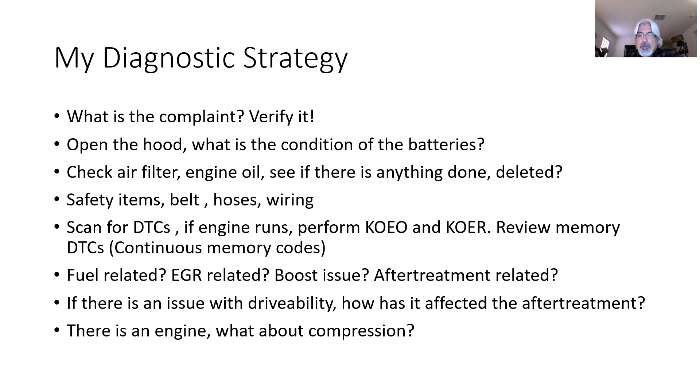So since we're focusing on turbos, let's talk about the 6.7 turbos. A turbo's only as good as the engine that it's running, but always remember something: any kind of turbocharger needs heat, and that pressure is the heat that we need. Obviously there's such a thing as too much heat too, but the point I'm trying to make is, do we have enough heat there? Because fueling can take a major toll.

So my frustration when I talked to technicians this morning, I was at the shop and they were telling me about how this truck had injectors and it just didn't have any power. And they're saying it's got $10,000 worth of things it needs on this truck, blah blah blah. And I'm like, dude, it could be injectors, because if you buy these from Joe Schmo Blow's injector rebuild service and they don't know what they're doing, it's like the injectors could be it, because an injector has to have so much of play.

That's all shimmed and calibrated by Bosch, on these piezo common rail injectors. Everything has a calibration, and it's not something you could just take apart, clean up, and put it all back together. Sure, you can take nozzles off and clean them or replace them, but the rest of the body, hell no.

Turbos need heat, and fueling is very important. That's why in previous videos I talked about the spray paint test. The Mitch spray paint test, if you've seen the videos, is where you take a spray paint and spray it on the exhaust manifold. What you're doing is firing up the truck, and if that paint doesn't burn off the exhaust manifold, you definitely got a fueling problem. In this case, it should be burning off, you should have enough heat there. So there's a quick tip.

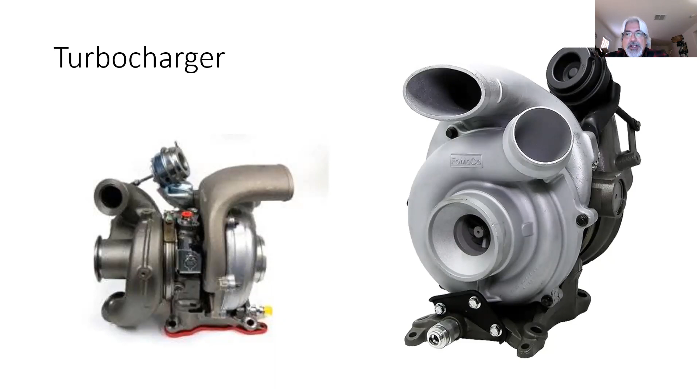Same manufacturer, but the biggest pet peeve we had with the 6-liter when we compared it to the LLY Duramax that used the same turbo, and in this case the variable vane turbos, I'll show you a brief video on that, is the fact that you actually had no... in other words, there's no feedback.

There's nothing telling it, because when I test a turbo on an LLY Duramax, all I got to look at on the scan tool is desired variable nozzle position and actual variable nozzle position. If it wants 10%, it's 10%, 20%, 20%, 30%, 40% - in other words, of those vanes opening and closing. If you don't know what I'm talking about on those vanes, hold on, I'll show you a brief video on this.

What I'm trying to say is that you're going to have a feedback. The Duramaxes opted to use a variable vane position sensor, so in this case the computer always knew the positions of the vanes, while on a 6.0 and a 6.7 - no, 6.4, 6.0 and 6.7 - the computer was only guessing the position of those vanes, believe it or not. So what is telling the computer the position of the vanes? He has no idea, he calculates it. He rehomes itself, but he doesn't know exactly where those vanes are at, he just guesses it.

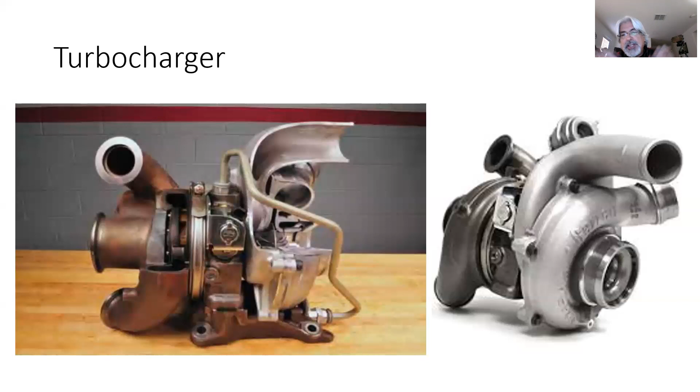So what are the main inputs that a computer uses? Both exhaust pressure and manifold absolute pressure, which is the boost pressure you could say, and the exhaust pressure. So that's what it's looking at.

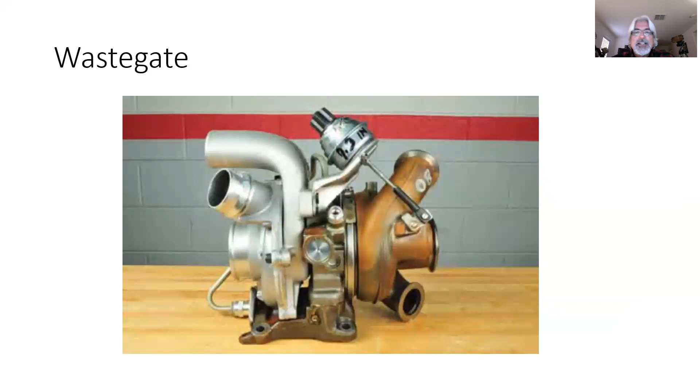With that said, the early versions of the 6.7, which was called a Scorpion motor, it actually had a variable vane, but it also had a wastegate. That's what we're looking at right here, that is the wastegate right there. So in this case, that was a vacuum actuated or vacuum controlled wastegate. In front of that motor, in front of the injection pump, there's a vacuum pump, which is not only used for the EGR bypass, but we're also using vacuum to control that wastegate. So yeah, there was a wastegate being used there.

When you saw the cab chassis versus the pickup on the introduction of this, there was narrow frame versus wide frame. The cab chassis truck was designed like an ambulance chassis or a motorhome - those are the cab chassis. The pickups are the Super Duties - F250, F350, F450, and so on. Those were using the wastegate with the variable nozzle, while the cab chassis was just variable nozzle.

And then to top it off there, let me backtrack here on the slide. Oops, I guess I'm gonna have to show it on here. As a matter of fact, let me zoom it up.

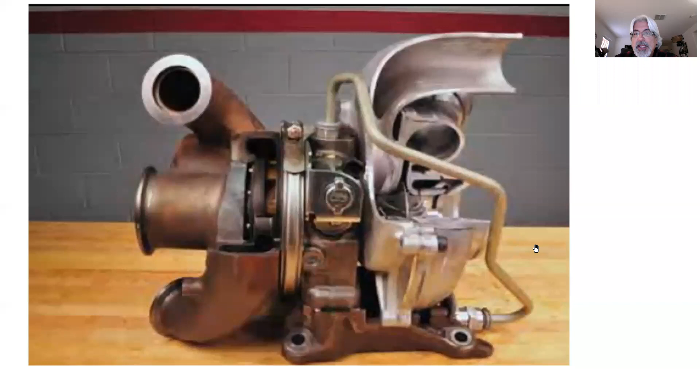You're gonna see that it actually was a dual setup. There were two impellers creating boost. If you look closely, there was a low pressure setup and a high pressure setup, so two turbine wheels utilized to create boost on these models. Ford called this Dual Boost. That created the adequate boost you needed.

Now, on the side of these, you're going to see there's an actuator, the turbo actuator. That's the solenoid that sits on the side, and that's what's controlling the vane. It's a two-wire connector. As a shop, we tend to stock these because we can test them, along with the pigtails. The connectors are always hurt, ears broken off or something, so we can install a new pigtail because we've seen loose connections causing boost issues. So check that connector going to that turbo.

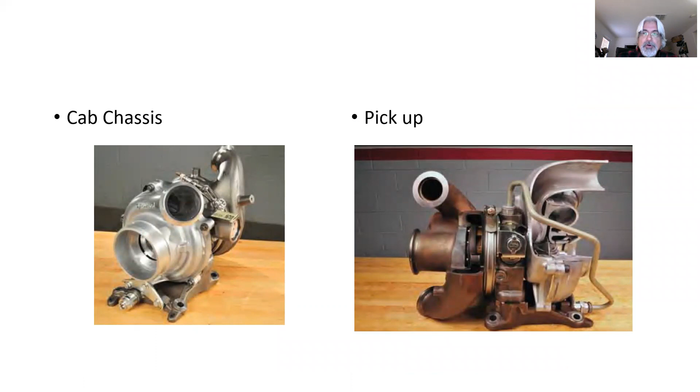When I hear about turbo leaks, the base of the turbo itself has both oil and coolant. The coolant maintains the temperature of the turbocharger, but there's also oil, used not only to lubricate the turbo but also for the turbo actuator. It's an electrohydraulic setup - we use engine oil pressure and the VGT actuator solenoid to move those variable vanes.

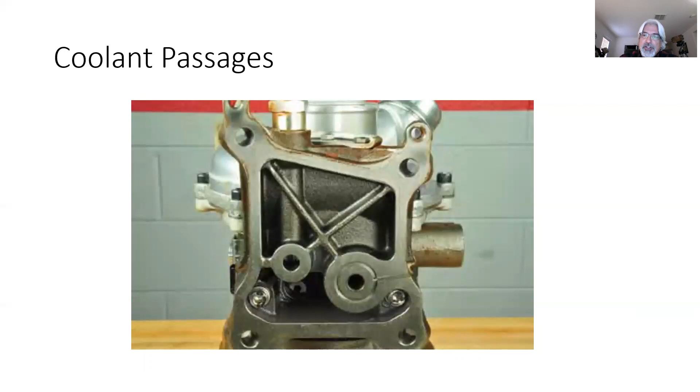It's imperative that this gasket must never be reused, and you need to torque it to specifications to ensure a good seal. When I see a sloppy job, the truck will come in with an oil leak, especially on top of the engine valley, meaning someone did not correctly seal or torque it. A torque wrench should be your best friend - you've got to torque those four big bolts that hold down the turbo, or you'll wind up with a leak. Make sure the surfaces are clean to do that proper repair.

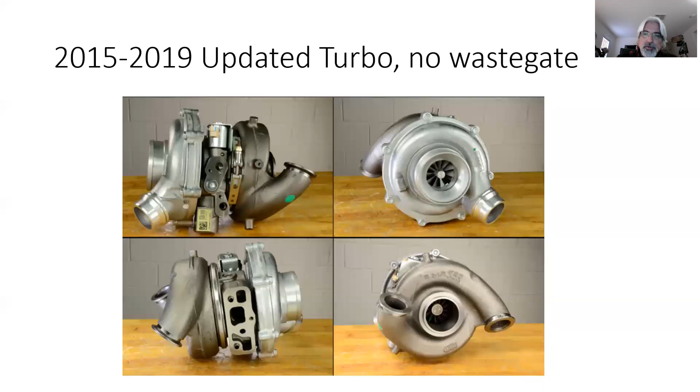Now, since time is of essence here, and I'm still keeping you awake, right? Got you here? You haven't left? You haven't clicked? All right.

In 2015, we saw bye-bye to the wastegate. I haven't confirmed this, and I always forget to call Ford to ask, but I'll update you in the comments later. What I'm trying to say is they got rid of the wastegate, no more wastegate, and went with one big turbocharger. The reason I haven't talked to the dealership is because I'm told, but haven't verified, that when you call for a turbo for an earlier model like a 2012, they'll sell you this turbo with no more wastegate. So stay tuned, I'll figure that out, but that's what I'm told.

The bottom line, as general information, is that for 2015 to 2019 we went to one big turbocharger on these applications. It's still got the actuator, still got the variable vanes, but it's just an enhanced, more robust version of what we saw with the cab chassis, just a bigger turbo. So no more wastegate as of 2015.

Now, what happened in 2020? In 2020 and 2021, we saw the Borg-Warner turbo come about. That one has the big fat square actuator on the front of it - we won't talk about that here. But yeah, they went to a Borg-Warner. These are still Garrett-style turbochargers, just like your 6.0.

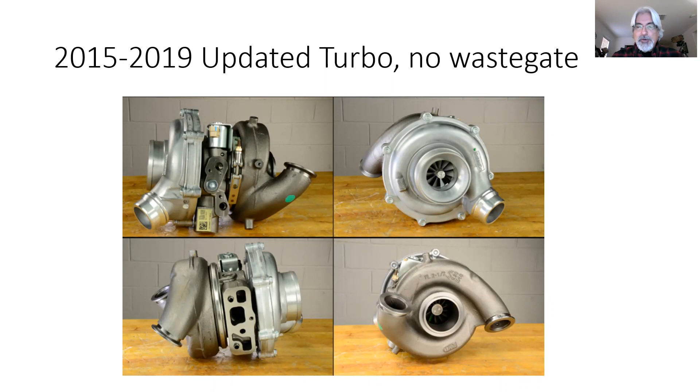Now when you look at what's going on with the turbo, hopefully this will show up here. A turbo naturally spins, you see the blue and the red, and we see that we're boosting air. So in this case, boost means to add pressure above atmospheric pressure. If atmospheric is at sea level 14.7 psi, anything above 14.7 is a boost.

Now on the exhaust side, like I said, we need heat. That heat and that pressure from the exhaust on both of the manifolds on the 6.7 generates that boost that we need in order to create the power that we need. So power is boost, right?

Well, if we flip this around, you're going to see that there's variable vanes right here. And those variable vanes, as you can see, are opening and closing. That ring that's moving those vanes is called a unison ring. And we see the variable vanes opening and closing.

So with that said, that is controlled by some type of actuator. In this case, this actuator is moving and closing those vanes. So in this animation, what we're looking at here is a solenoid, and that solenoid is controlling the engine oil pressure.

Let me pause this for a second. Now that engine oil pressure comes in through here on the top. You'll see an oil line on top of these turbos, both on the 6.0s and the 6.7s. So in this case, that oil pressure is going to be diverted either to exhaust or to apply oil pressure.

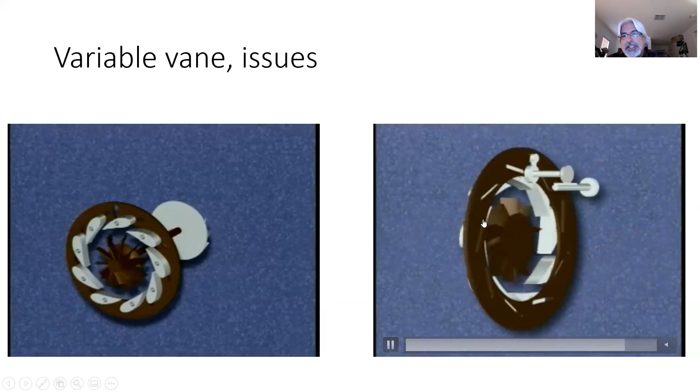So if I apply oil pressure through this passage, it's going to fill this gap and push this piston to the other side. Now as you see that piston moving, it's moving a rack and pinion, which actually moves the unison ring, which is opening and closing those vanes. See that? I know I said it kind of fast, but you can always press rewind.

But let's look at it a little bit closer. Excuse me, wrong button. What I'm going to try to do is zoom this up and show this. Okay, so as I press play here, come on... let me backtrack. Let me play it, and let me move it forward.

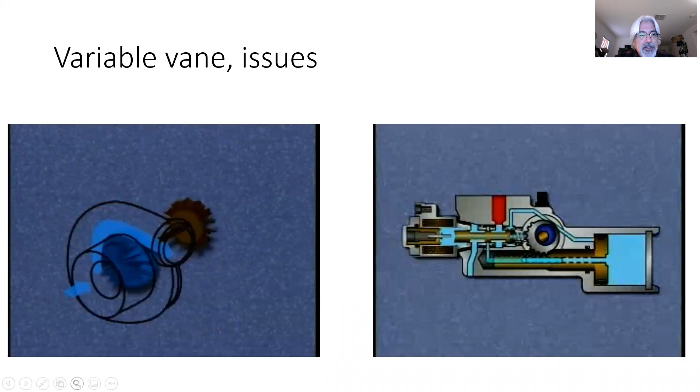There we see the rings. Hopefully we can see this as I zoom it up. You're not going to be able to play it zoomed up.

Okay, well what I was trying to do is show you once again that the movement of these vanes is attributed to the fact that the rack and pinion is moving them, which is this guy over here. But these vanes open and close.

Now as the vanes close, let me stop there. Watch the speed of the wheel here. What you're going to notice is it slows down and speeds up. So for example, as I'm going 65, 75 miles down the highway and I need more power, I'll hit the accelerator, the vanes are going to close. So therefore I'm going to see more boost created. And then as I back off on the accelerator pedal, let's say I'm starting to cruise a little bit, the vanes will open up. So these vanes open and close.

So let's play this again. What I'm going to see here is as the vanes close, we should see this wheel spin faster. So come on, let's go. There we go, it's starting to close, spins faster. See that? But when the vanes open up, they slow down.

Now why does that happen? Well, let's backtrack again. So in this case, they're closed. What's happening is that the area between these vanes, where my cursor is right here, is either becoming narrow or becoming more open. And it's called the Venturi effect. The Venturi effect is actually creating more speed, so that exhaust is coming up with more speed, but the problem is it creates more back pressure.

That's the Achilles heel, or the weakness, of these turbos: as these vanes close to create more boost, that means it's a narrow passage. On one side you're going to have higher pressure, but on the back side you're going to have a lot of pressure too being built up because you're restricting the flow. So the weak part of this is that it generates a lot of back pressure. That's the bad thing about them.

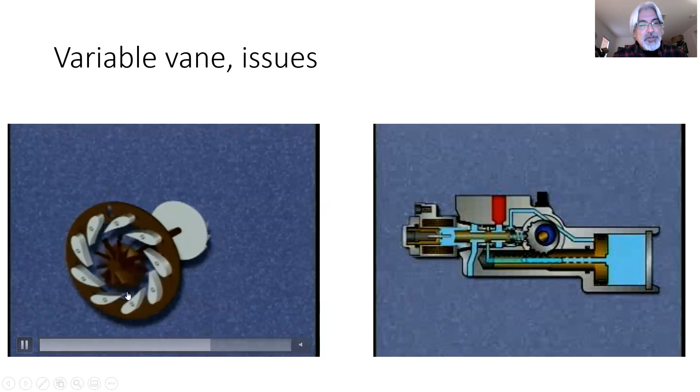But anyways, what it is, is these vanes are creating a venturi. If I could see this opening right here, as I hit play again, you're going to see it. This opens and closes this gap right there. So again, opening and closing the vanes: more pressure spins it faster; opens up, less pressure, therefore not as much being created. This turbo can spin slower.

So what is the advantage of a variable vane turbo? The advantage is that it can act as a small turbo or a big turbo. With wastegate style turbochargers, they create boost, boost, boost, boost, and finally the wastegate opens and pressure dumps, boost goes bye-bye. It builds up again, wastegate opens, it dumps.

Here, it can vary the boost. So therefore I can have 10 pounds of boost, 15 pounds of boost, 12 pounds of boost, all within the movements of these variable vanes.

But like I said already, the problem on a 6-liter and on a 6.7 is that the computer has no clue what these vanes are doing. So that's the problem. It looks at boost, hey I'm getting boost, it's looking at exhaust pressure. Yeah, on a 6-liter the exhaust pressure is there, but it really doesn't add a lot of feedback in terms of controlling what the turbo can and can't do.

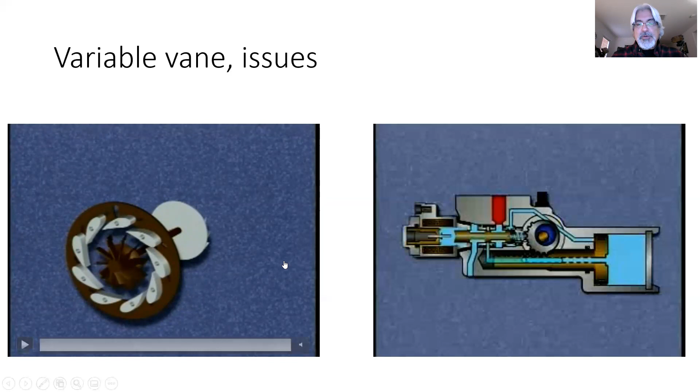Now going back to the actuator once again. What's going to happen is this actuator is merely a spool valve that channels oil pressure to the center or outward, and also releases this pressure. Here you can see the pressure coming out of this, and this is all channeled by the spool valve within the actuator, which is moving the rack and pinion.

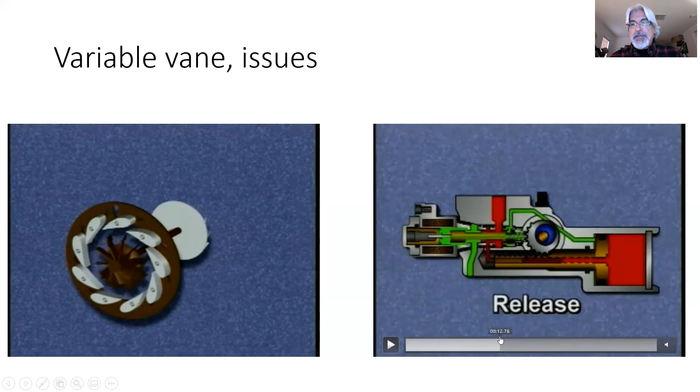Hold on a second, let me come back here. So in this case, this is moving the unison ring right there, you can see it right here. So what's moving this piston from side to side on this part of the rack and pinion is oil pressure, pushing on one side to the other.

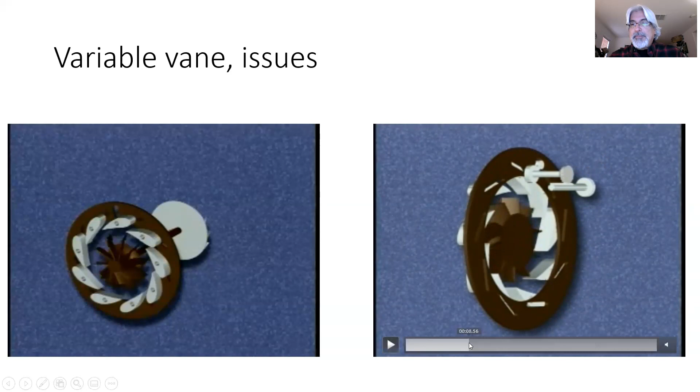That's why it's imperative that oil be properly maintained for proper life of these turbos, because it not only lubricates, but it also acts as the coupler, or shall we say the actuation, that makes this piston move from side to side to move this rack and pinion in order for the unison ring to open and close those vanes. So that's what we're seeing there.

So when guys look at sticky turbos, I mentioned the unison ring, but what can also cause a turbo to stick is poor quality oil that can actually stick this piston right here. What else can do it is the spool valve having a lot of gumming going on right here. So in this case, that spool valve can stick. So that's what can happen too. Not a good thing.

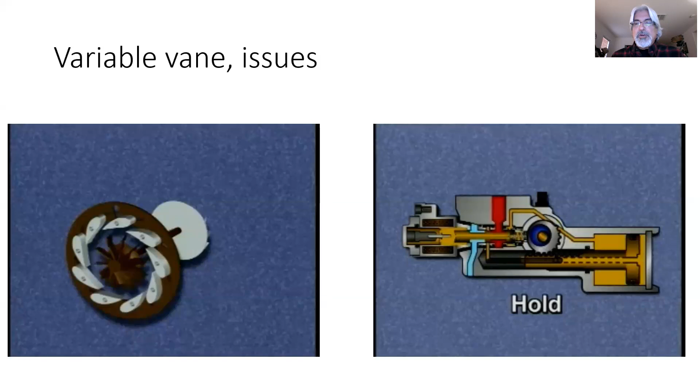All I'm saying is that in order to prevent issues with the turbocharger, you always want to ask: do I have good quality oil? Good oil, good. And again, make sure there's no intake or boost leaks going on.

But speaking of leaks, moving on, one of the tools we use is a smoke machine to find leaks. If you don't have one, that's okay. You may want to look at the boots and closely inspect them, and quit being cheap about buying a new boot.

Call Ford, call whatever auto parts store you want, and get some new boots. If the truck has over 100,000 miles, here in Vegas we get dry rot from the intense heat and intense cold. So it's a good idea to replace those boots and clamps if needed.

But in this case, on a 6.7 and on a 6.4, we do smoke tests because we're trying to find leaks. You'd be surprised how many leaks we find on many trucks when we do smoke testing, all over the place—from the intake manifold to the EGR base gasket, and also the boots you can see here. So that's a nice thing about having a smoke machine, to find any issues.

Another problem we have with creating boost is that I need good exhaust, because the back pressure I'm generating otherwise isn't good. So imagine this as we're looking at boost—I've already shown you this video, but here's the thing.

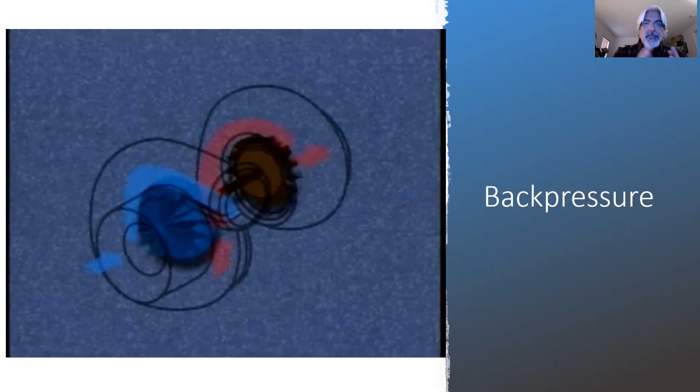If we're working on a 6-liter, for example, the story I classically tell guys also works on a 6.7. I tell them: okay, you're driving down the road, right?

And all of a sudden a rock goes across the charge air cooler on a 6.0. We have a separate coolant-cooled charge air cooler on the 6.7, so it won't happen there, but it'll happen on a 6.0. But I'm trying to make a point here: you've got to put yourself in the computer's place, the controller, saying, 'I'm controlling the actuator on this turbo.'

I'm making the oil go either direction to control the position of those vanes, in order to create boost.

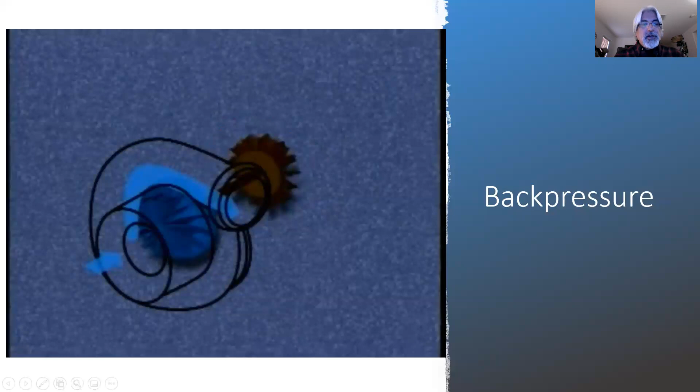So if you forgot what I'm talking about, it's this guy right here. Who controls this is, like I just showed, the rack and pinion—it's actually opening and closing to create the boost, right?

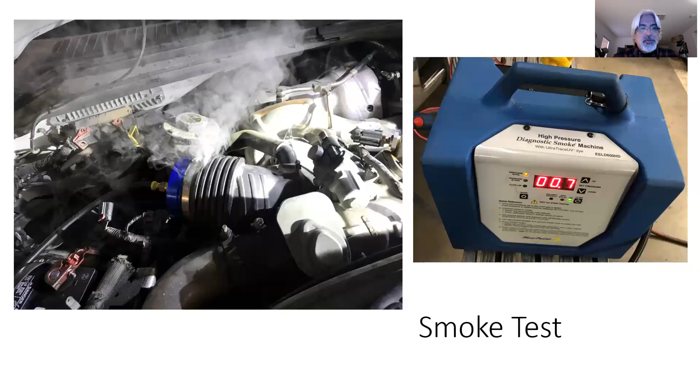So the question is, what tells the computer where those vane positions are at? There's nothing—on a 6.0 and on a 6.7, there's no feedback sensor for vane position. His mission is just to create boost. So going back to where I started, the computer is playing the role of the controller—he's the man deciding what's going on, right?

So what's happening is, once again, you're going down the road, let's say pulling a 20,000-pound trailer behind you, and there's a big 6% grade coming up.

And all of a sudden a rock goes across that charge air cooler on the 6.0. Now what's happened to boost? It's leaking out. All of a sudden the MAP sensor, which is measuring that boost, is telling the computer, 'I got no boost, no power.'

Now the driver sees he's got no power, so what's he going to do? He's going to press harder on the accelerator pedal. Still no power. Again, the computer goes to the MAP sensor saying, 'Dude, what's going on with boost?' And the MAP sensor says, 'I got no boost.'

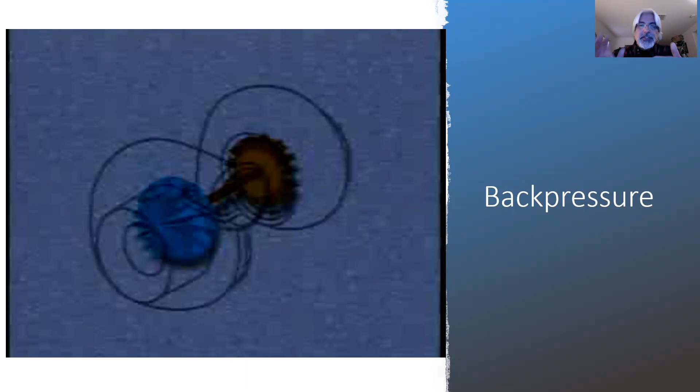So in other words, how long has that truck been running with those vanes continuing to close? Because when the MAP sensor says there's no boost, the computer doesn't know what's going on with the vanes—he's just going to close them more and more and more. So what's going to be created? A lot of back pressure.

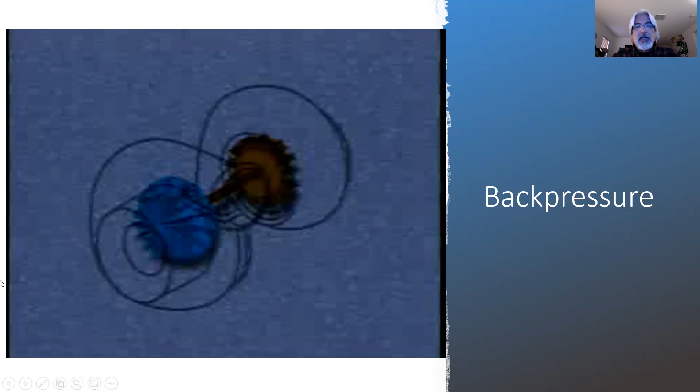So as we see in the animation, once again, let me skip over here.

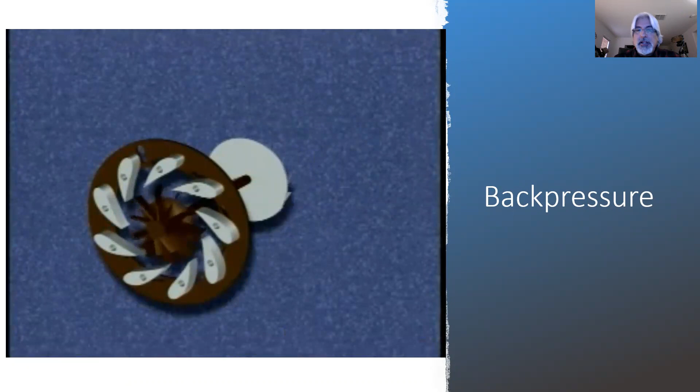If he wants more power, he's going to close these vanes more and keep them closed. The problem is, as we keep them closed, as we see in the animation right there, there's not enough gases going across, not enough pressure being relieved from the exhaust, because the exhaust manifold sends that exhaust right to these vanes. In other words, all exhaust must go through those vanes in order to go out the downpipe.

Did you hear me? All exhaust must go through those vanes in order to go down the downpipe down to the exhaust. So in this case, if these vanes are closed, that means you're creating a hellacious amount of pressure. But it's not so much the back pressure, it's the intensity level of heat that you got there.

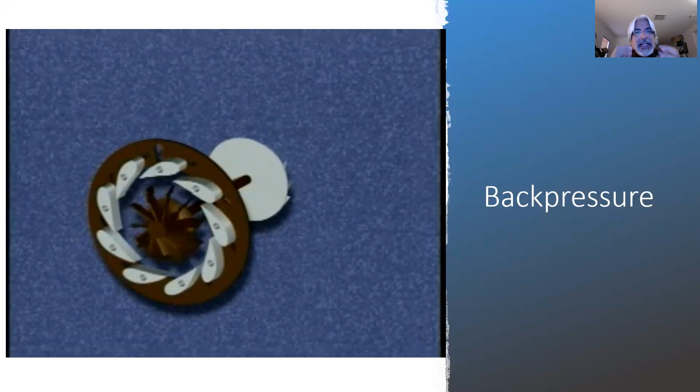So when you see a head and head bolt stretch, it's because that piston is fighting all that back pressure, because you've got that pedal slammed to the floor, max fuel, but no boost, creating a lot of back pressure because these vanes are really closed.

The reality is, you may not have learned this from anybody, but when these vanes are closed dramatically because there's a loss of boost, maybe a boot came off or something, it's because the turbo is commanding those vanes fully closed, as you can see here in the animation, and that creates problems.

So this is what I don't understand from Ford. Ford, I love you guys, sorry, but on the Duramax, the engineers at Isuzu and GM said, hey, we're going to put a vane position sensor there. So on a GM Duramax 6.6, the computer knows the position of those vanes. If those vanes close for too long, the computer program says, it's closed too much, and opens up the vanes. That's why we don't see as much head gasket failure on a Duramax application.

So in this case, that's a big issue. Ford didn't use it on the 6.0 and didn't use it on the 6.7, which can lead to head gasket failures or just massive heat being generated. That's why I was elated to see the 2020 truck, because it went with Borg Warner.

It's still variable vanes, somewhat like this design, but there's a big fat square actuator in front of it, and that actually monitors the position of the vanes. So if the vanes are closed too long, the computer will kick it out and open those vanes.